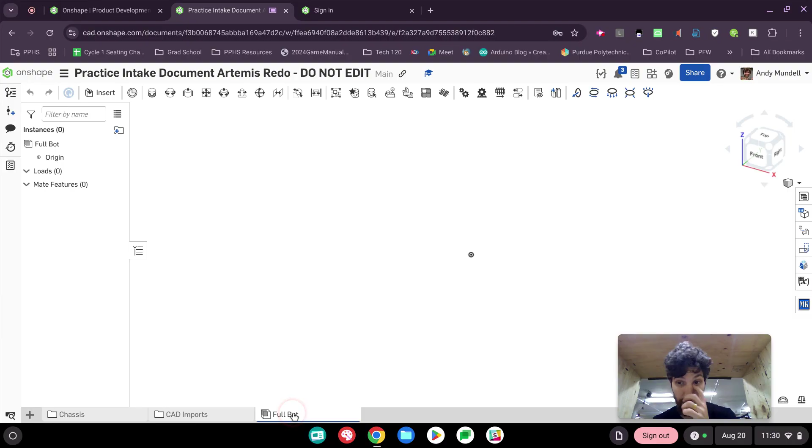All right, let's go back to the Home, and we'll find the full bot assembly, which shouldn't have anything in it yet. I'm going to click Insert, and I'm looking in the current document. I'm going to look at my assemblies, and you'll see the only assembly I have so far in this whole document is the chassis assembly. Let's add that to the full bot.

Now, one of the reasons I made this reference cube is so that all of my assemblies can kind of be positioned relative to each other. So I do want to click Fastened, and I want to fasten the top of this cube to the origin pointing up. Okay, there we go. I also don't like seeing all these mate connectors. Let's hide all mate connectors. There we go. So I fastened that in place, and none of it should be able to move at all.

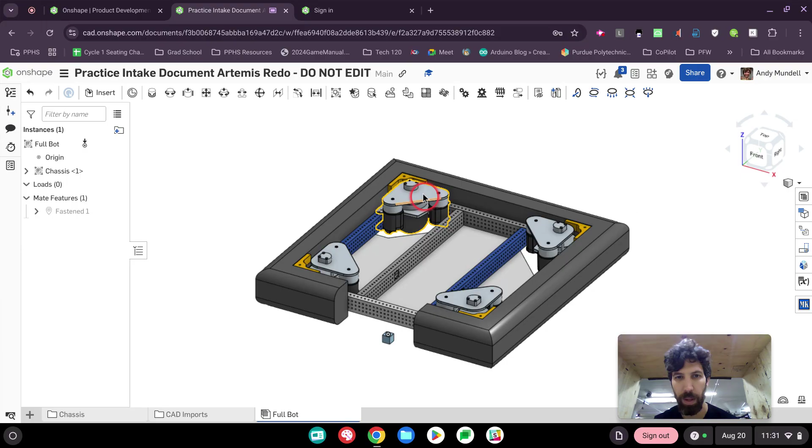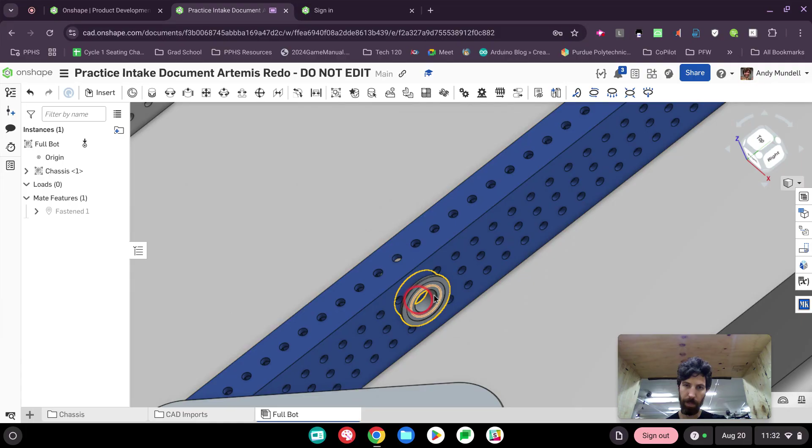If you did the chassis assignment before, you'll notice there's some small differences. I've added some bumper mounts. I took out this section of the bumper, which these days FRC makes you have full bumpers, but back when Artemis was made, we had a gap here so that the ball could come in, and that was legal then. So just use the one I've got here, even if you made your own chassis. Use this one because it's updated. I've also made sure to add bearing holes here to the chassis where we're going to mount our intake. So it's already there.

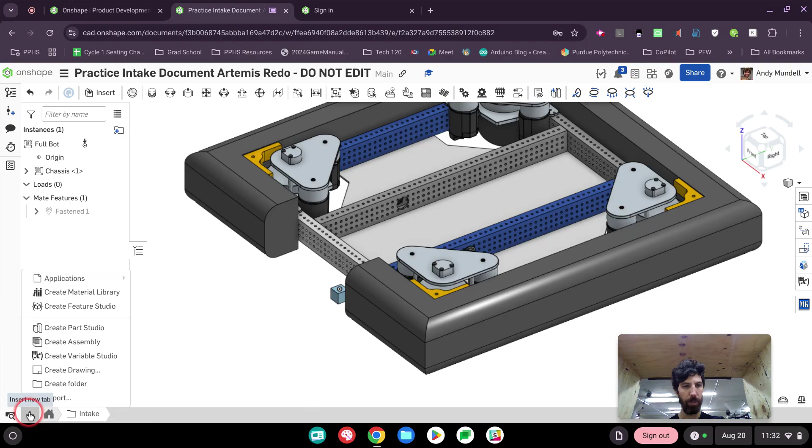All right. So the next thing I'm going to want to do is start making my intake. So I'm going to go click, make a new folder, create folder. Let's call this folder Intake. And within that intake folder, I'm going to create a new Part Studio. And they call it Part Studio 1. Let's call this Intake Part Studio.

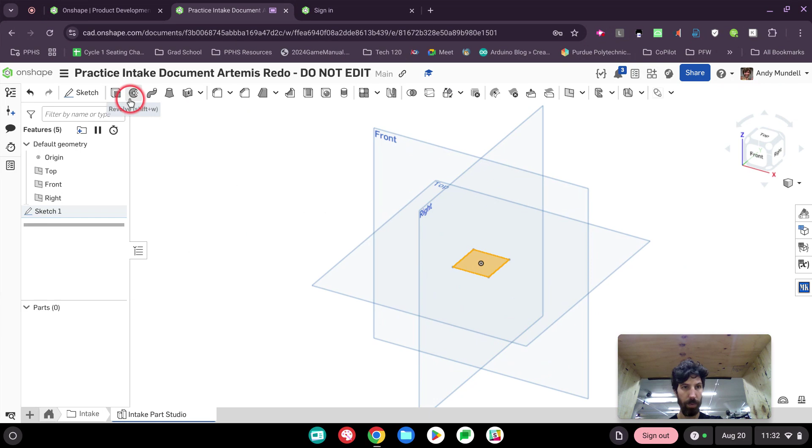Okay. I'm going to make a reference cube, and then I'm going to make an intake assembly. So let's sketch a reference cube here in the top plane. Center point rectangle. It's 1 inch by 1 inch. And I'm going to extrude it downwards. Okay. Let's go ahead and create an intake assembly. So let's click plus, create assembly. It's called Assembly 1, but let's rename it as Intake.

Let's go ahead and insert our reference cube. So we're looking in the Intake Part Studio. We're selecting Part 1, which is the reference cube. There we go. And just like we always do, we're going to fasten this reference cube to the origin. So let's click Fastened. There we go.

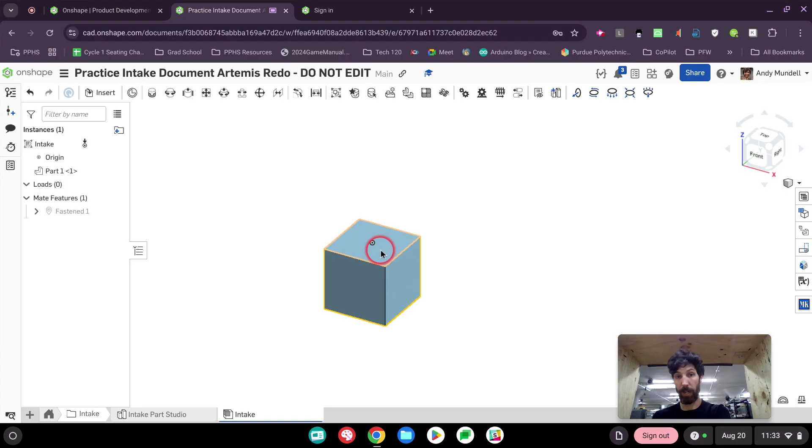All right. What do we do now? Well, we could start modeling intake parts, but I want to take advantage of what's called in-context editing. So the first thing I'm going to do is take my intake assembly, which right now is only the reference cube, and place it into my full bot assembly. So let's go back to the Home. Let's find my full bot assembly. Here we are. And let's insert.

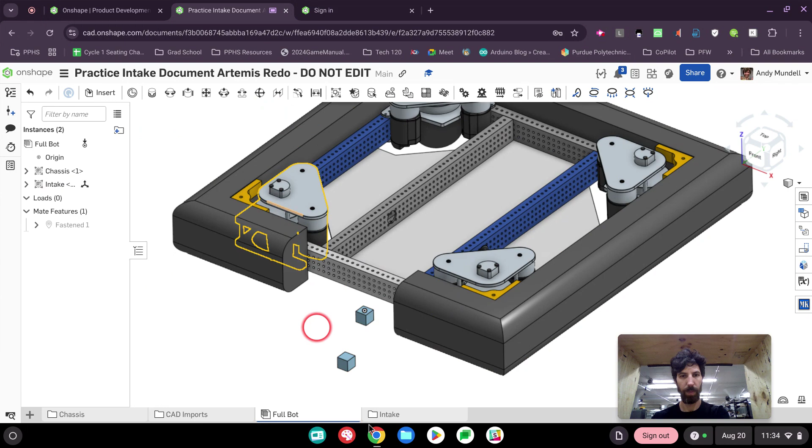We have our chassis in here. Let's insert the intake. Insert. Let's look under Assemblies. There's my intake assembly. So I'm going to click it. And you'll see all I have is a reference cube. But I'm going to make sure that that reference cube is fastened to the same location as my other reference cube.

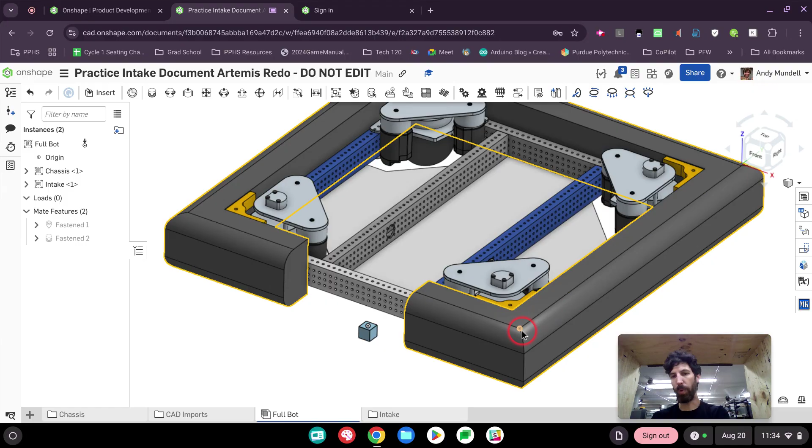Now that it's in here, I'm going to do what's called in-context editing. I'm going to edit my intake parts with a ghost of the rest of the robot around. Before I do that, let's hide some things that I won't need. So for instance, I won't need the bumpers when I'm making this, and I won't need the bumper mounts for sure. Okay. I'm hitting the Y key as I hover over things. That's a great way to hide things quickly.

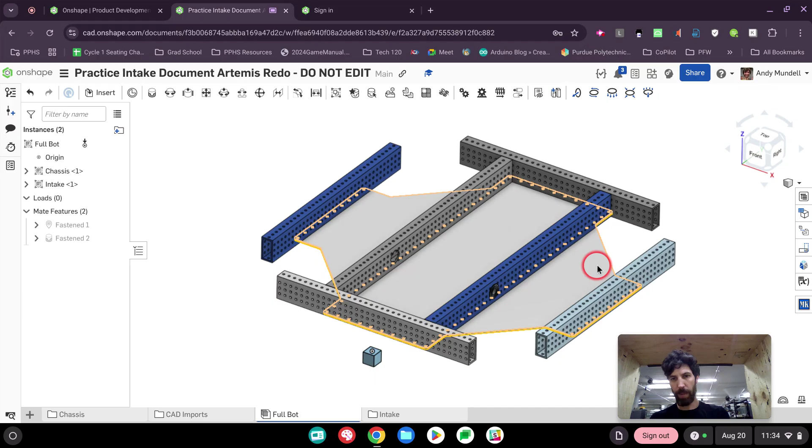I probably don't need the swerve modules as well. They're going to kind of be in the way. I'm really going to need this rail here, and I might want to be aware of the front and the back rails, and maybe the belly pan here. So let me hide these side rails here. So this is kind of what I'd like to be able to see as I reference and build my intake. So this is the context I want to build my intake in.

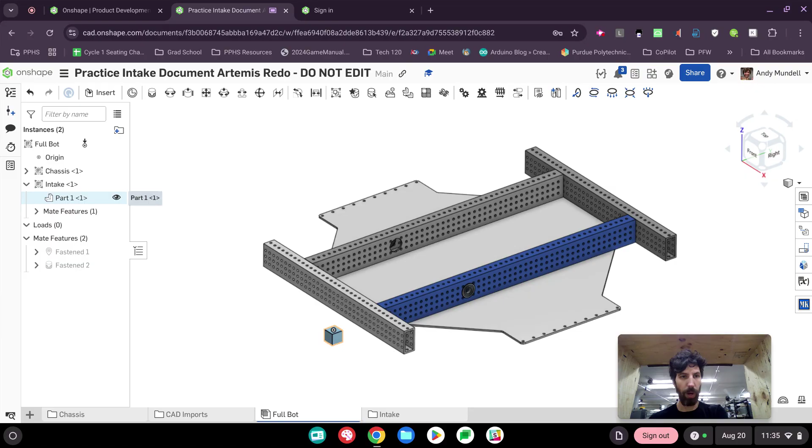All right, so let's go into my intake parts, and we'll find part 1. This is the reference cube. And you can do this for any part that's in the assembly, but this is the only part from our intake. So I'm going to right-click on part 1, and I'm going to select Edit in Context. What that does is it takes me back to my intake part studio. You can see at the bottom I'm in my intake part studio, but it now shows a ghost of the full bot assembly in the state that I had it in.

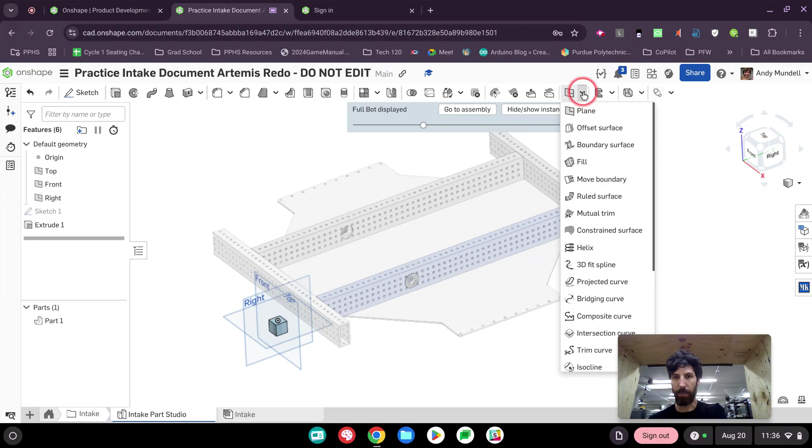This is really helpful because I'm going to use this to build things. So for example, well, actually, I'm not quite done. I've got my context here. I also need to import or derive my intake 2D sketch. So I haven't done that yet. There's a lot of setup that goes into these things sometimes. Let's find the derive tool. And if you can't find it, you can always use search, but it looks like it's under this menu here, derived.

I'm going to select from other documents. This is in the FRC team drive under shared CAD, Artemis practice CAD, 2D sketch. And let's go ahead and put in, we really just need the intake sketch, I believe. It might be useful to have the chassis side view later. I don't think we need it. Yeah, I think we're good. I'm just going to use this. All right. So now I've got this sketch built in here too. So I've got my derived sketch, my intake. I've got my context open.

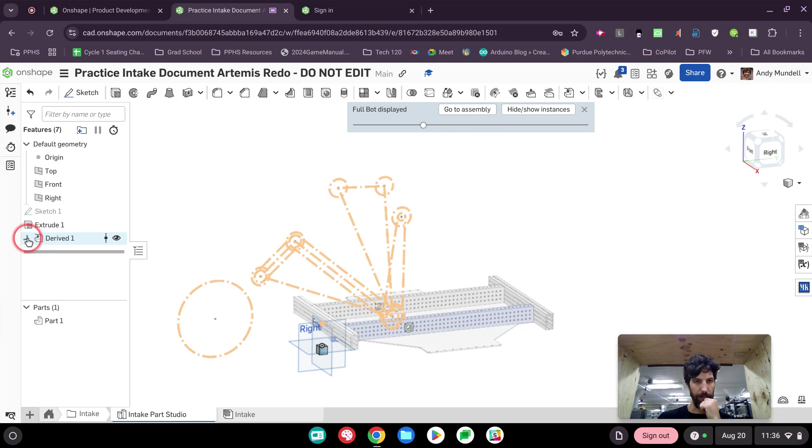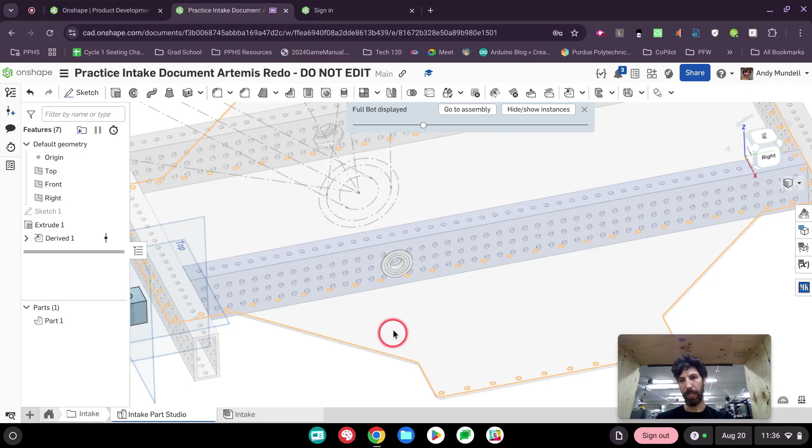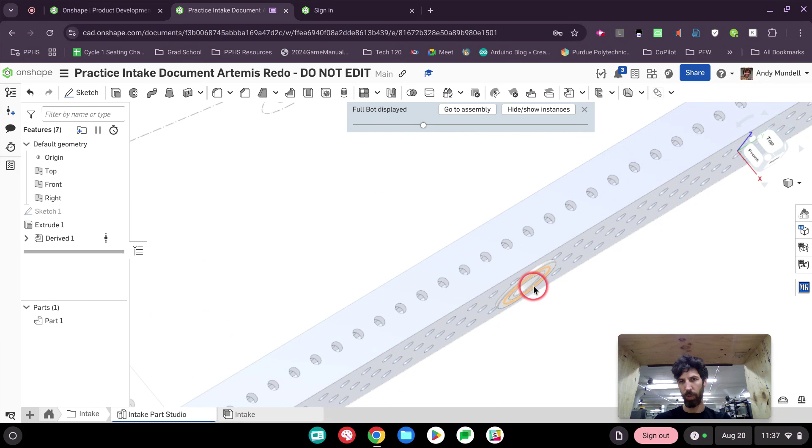Let's kind of start building. I think the first thing I'm going to want to do is start building a plate. All right, let's build a side plate. So where am I going to build that plate? Well, it needs to be sort of offset a little distance away from this side rail, enough where I have space for this bearing. I actually also want to have space for the indexer structure here that's going to attach to this rail on the outside about 1/4 inch. So maybe it needs to be 1/2 inch off of that. Let's go ahead and do that.

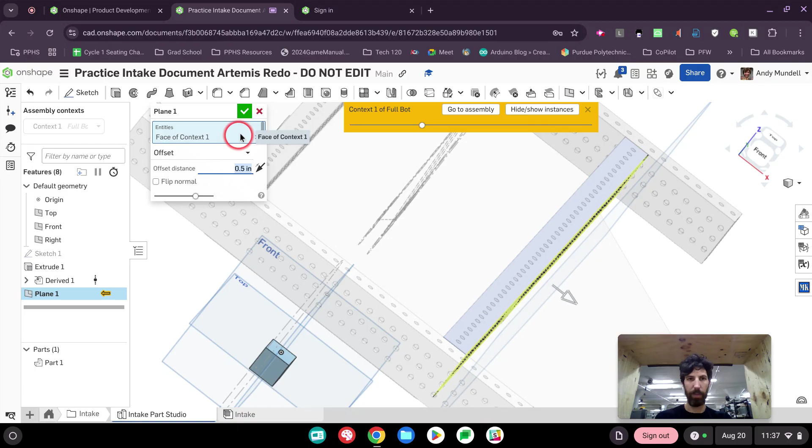Let's grab my plane tool. I think it's under the derive now. Yep, there's the plane. Find your plane tool. I'm going to select this plane right here to offset off of it. And I'm going to offset from there. It's an offset plane. Let's do 1/2 inch. And I'll be able to change this later if I change my mind. There we go. So this is the plane I'm going to create my intake side plate in. Let's click sketch and let's select that plane.

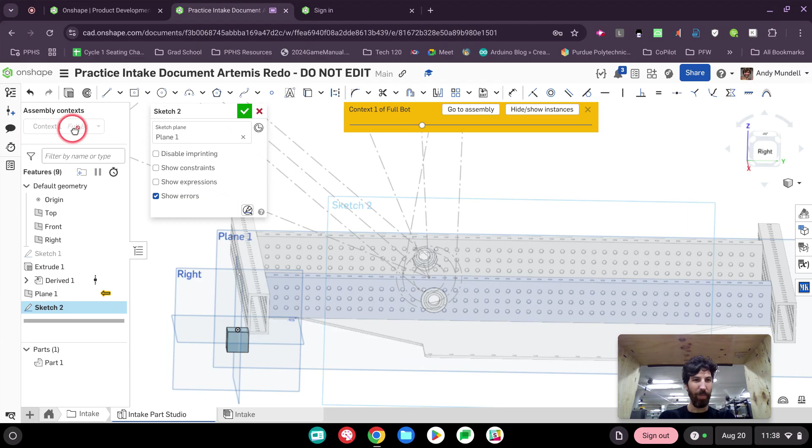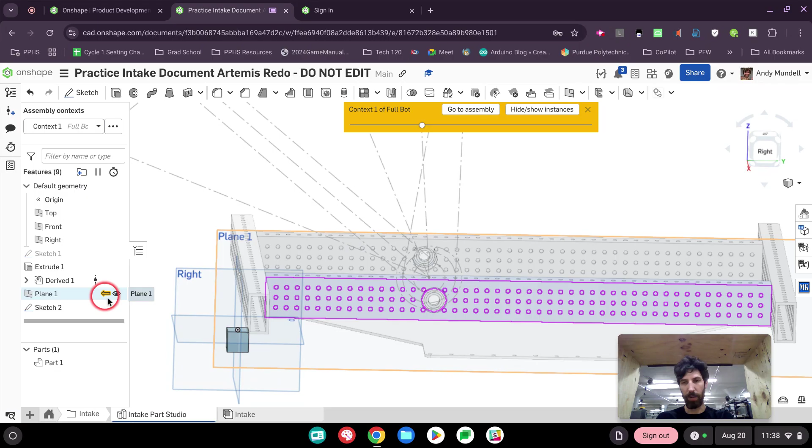Oh, one thing worth noting. Do you see how plane 1 here has got this yellow arrow? That means it used the context. This is important because you want to know what context you're using to design these things. And also, if you never use the context, it will disappear. But now that I've used it, I can go up here and I can select context 1, or I can turn off the context. But because I've used it here, I can go back to it, and then we can see all the things that have been made out of that context. All right, let's reopen Sketch 2.

All right, so what's this plate going to do? Well, this plate needs to be the pivot point here on the chassis. It's going to connect via a belt here to power the intake. And something not pictured here is it's going to connect via chain right here as well. That's going to allow me to pivot the whole intake. And then from the power of this motor, it's going to belt up to here and down to here to get these wheels spinning as well.

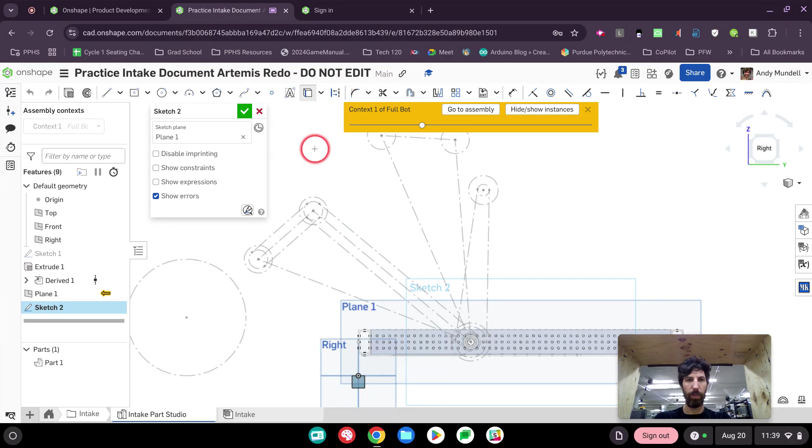All right. So the first thing I might do is to take any geometry from my sketch and insert it in. So for instance, I need to know where this wheel is and where this wheel is. That way I get the distance between them correct. I definitely need to know the center right here. And I think that's all I really need right now. Let me go ahead and hide the rest of that sketch.

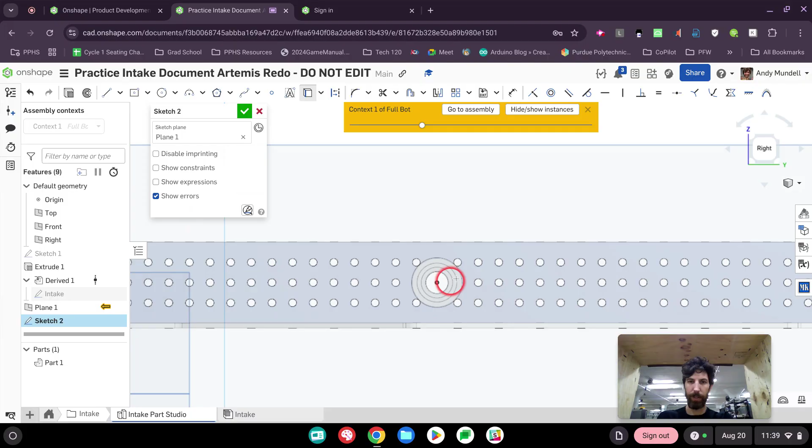All right. So what's this plate going to have here? It's going to have a hub inside of it, which I believe the diameter of that hub is the same as the diameter of the bearing. Let's do 1.125. I might be wrong about that, but I think it is. So it's going to fit a hub inside of it.

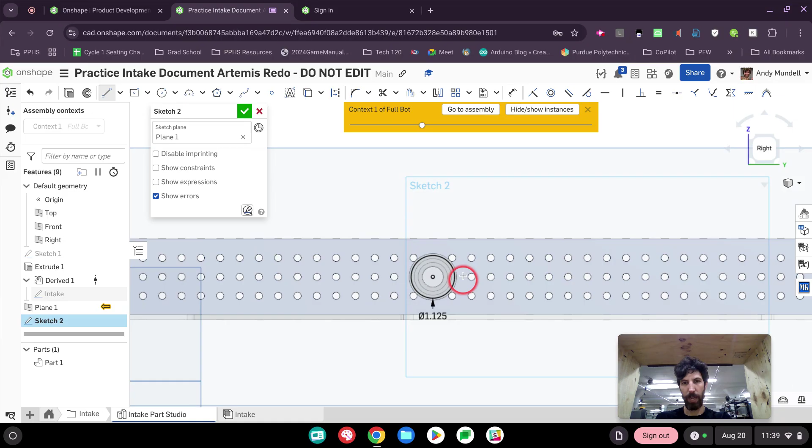And then on the outside, it'll have to have some holes to attach to the hub. But I might wait until we put a hub in it before I use those holes to put the holes in here. Actually, let's not. Let's just look up what that hole pattern is. Let's go to ThriftyBot. They have a lightweight hub that I like. Is it under motion? I'm just going to search for hub.

Number 10 hole pattern hex hubs. Here we go. And we've got the 1/2-inch hex bore thin hub. I'm going to use the thin hub. They include both a 1.875 and a 2-inch bolt hole pattern, so we can use either one. Yeah, let's go with the thin one. Let's go with the 2-inch bolt pattern. I always like that. And it looks like they are spread out in 6 holes.

While I'm at it, let me go ahead and download this CAD file. It's right here. Hex hub 0.375. Which one are these? Let's get a list here. Thick. Here's the thin one. I'm going to download this one. Okay, so I've got it. Let's go back to our document here.

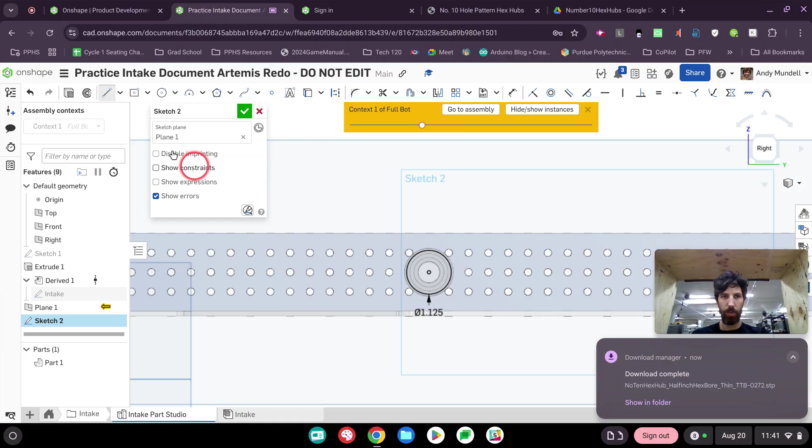So it's got a pattern here of number 10 holes, 6 of them on a 2-inch bolt circle. Actually, let's not do that. Let's grab the bolt circle. 2-inch bolt circle. I made that a construction line because it's not actually a feature. I'm just going to use it to build stuff off of. 0.201. And let's grab my circular pattern tool. Pattern that with its center being right there. And there's going to be 6 of them. Okay, so I've got that.

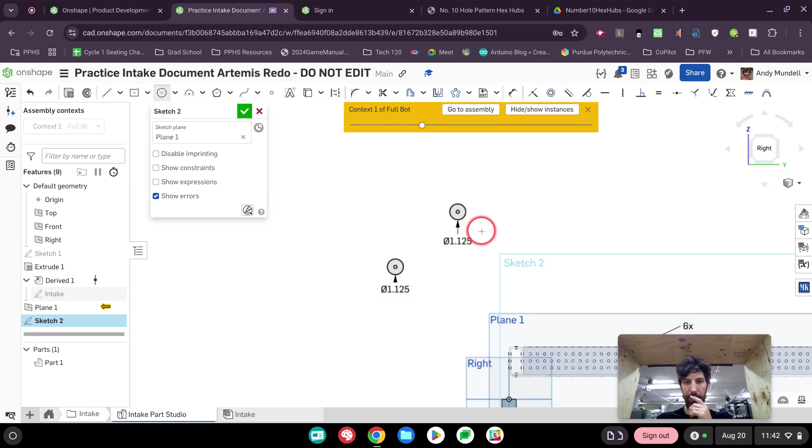Let's go ahead and do the rest of this. Up at this point, there's going to be another bearing. 1.125. This is our standard bearing size. We can make it 1.126, but this is polycarb. We can usually shove those in pretty well, or we can grab the reamer if it's too small.

Grab the line tool. I'm going to create a line that goes from here up to here. If I take the line tool back on itself, I can now make a curve. That's a nice little convenient thing here. Be careful. See how it makes that orange line? That's going to force that to be horizontal. I don't want to force that yet. So I can either avoid it and click, or I can hold shift. I'm trying to avoid accidentally having constraints that I don't want.

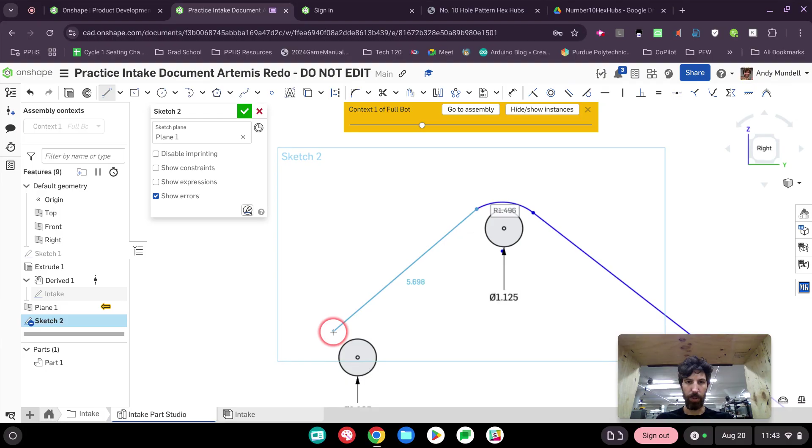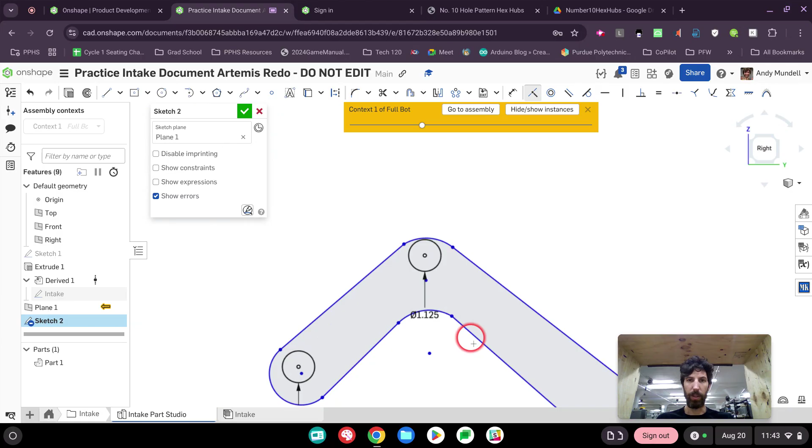There we go. Let's add some of our constraints. Coincident, a big one. Any of these arcs, I want them to be coincident and centered around the feature they're going around. So for example, this one right here, I want it to be that right there. And this one goes right here.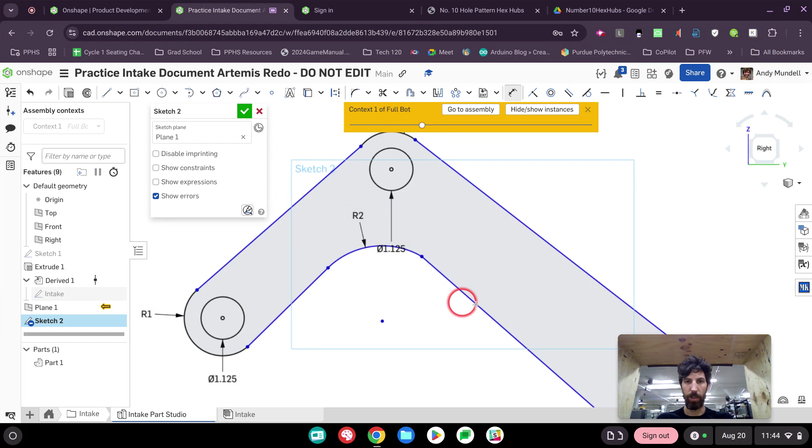Okay. Let's define some dimensions of these here. Let's make this maybe 1 inch. Let's see if this one works with 1 inch radius. Okay. This one, let's make this a bigger radius. Let's do 2 inches there. And this one here's going to be a larger radius as well. Let's try 2 inch. That's too big. 1.5. That might even be too big. Let's do 1.25. I think that works.

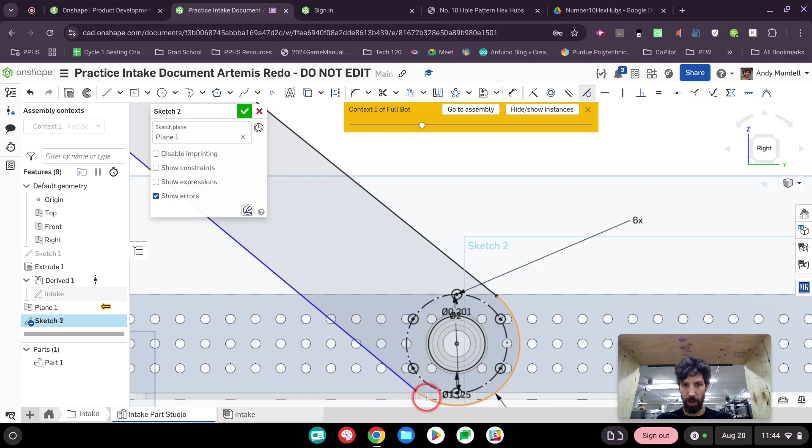Cool. You can see a lot of these things are still blue, so they're missing some constraints. I think we're missing a lot of tangents. For instance, this is clearly not tangent to that. While we're here, let's make sure this one is. Let's go up here. This one and that one.

Essentially, these features should go black if they're fully constrained. I don't think I've got the location of this here constrained. I think what I'll do for this one is I'll say that these two sides have to be parallel. There, and then this one has to be parallel to that as well. Okay, it looks like maybe I'm still missing a tangent here.

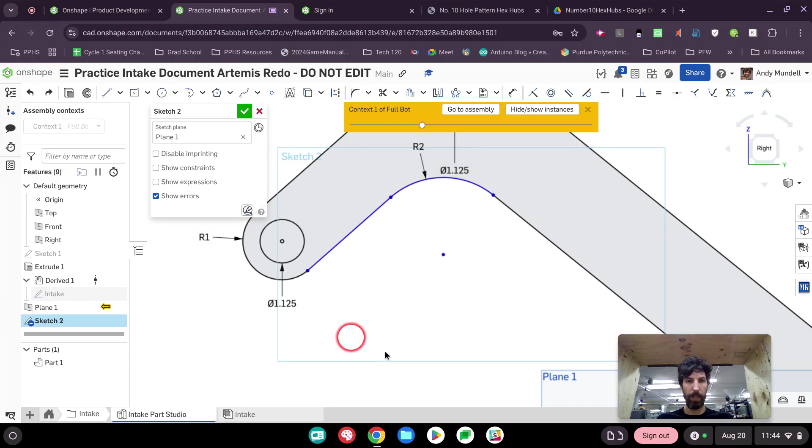If you ever don't know what constraint you're missing, let me undo that one. So let's say I didn't know what constraint I'm missing here. If I don't have any tools selected, I can grab one of the blue dots and I can usually move it. See, like I'm moving it. So now it becomes obvious what I'm missing. I'm missing this being a smooth transition. So if you ever don't know which constraint you're missing, try to make it obvious which one you're missing.

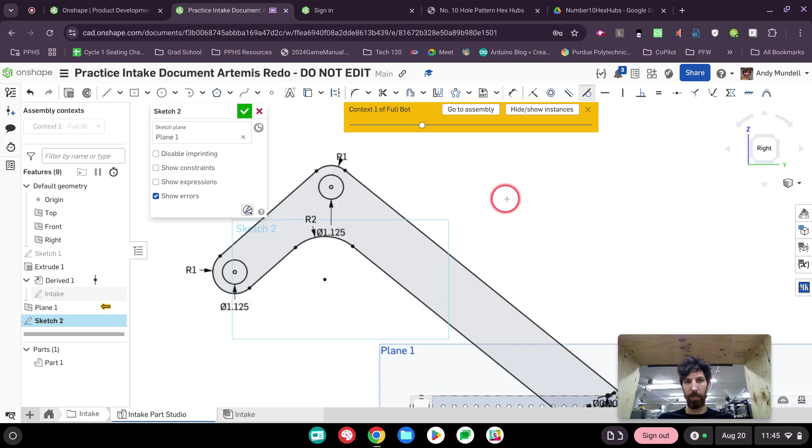Okay. I think that's good. This looks like a decent plate. I think the only thing I might be missing is as this pivots in and out, there's going to be an indexer in the way here, so I can't run anything between the two side plates. But up here, I might want to have some structure as this belting and these wheels are here, something to keep this distance right. So let me go ahead and add that.

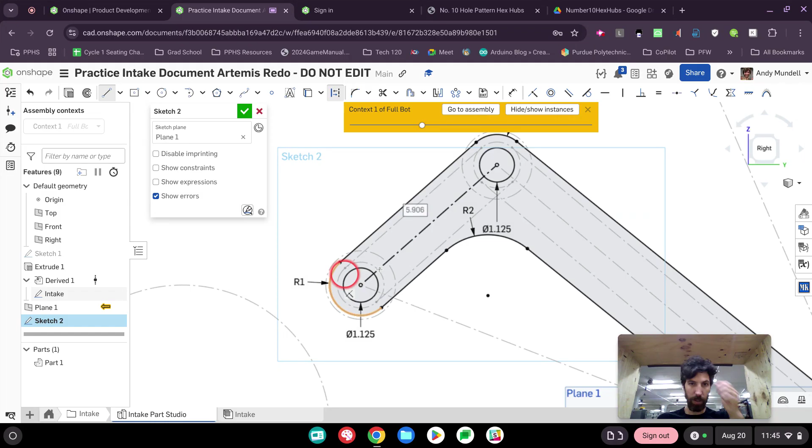Now, if I bring the other sketch back, you can see that my intention on this is to have, I believe, 2.25 inch wheels. Let me move this up here, 2.25 inch wheels. So those are there. So I want to make sure, and this is why this sketch is helpful, that if I'm going to put a churro here, I need enough distance between it and the wheel. Let's go 1/2 inch distance. That way I'm not going to accidentally have my churro hitting it.

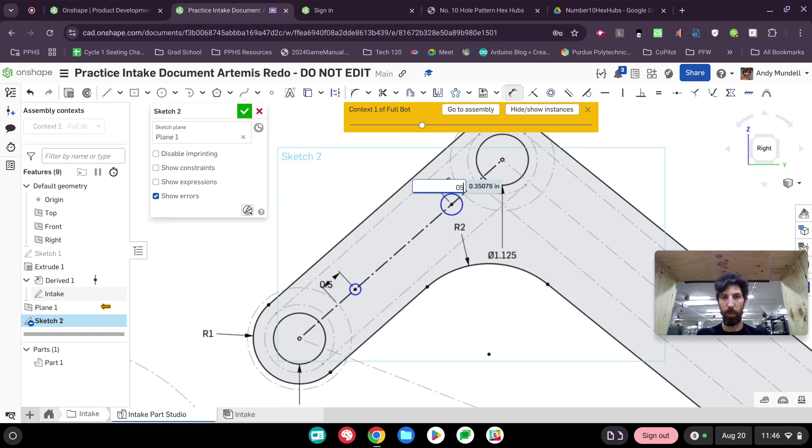And actually that needs to be not a construction line. There we go. So this distance here, let's make it 0.5. Oops, undo. 0.5. Now, if these are churro, they take a 1/4 bolt in the end. So let's just go ahead and dimension these holes to be 1/4 inch. And we'll make them both equal. Just like that. Cool. I think that's pretty good. I may have more things to add later, but essentially that's it.

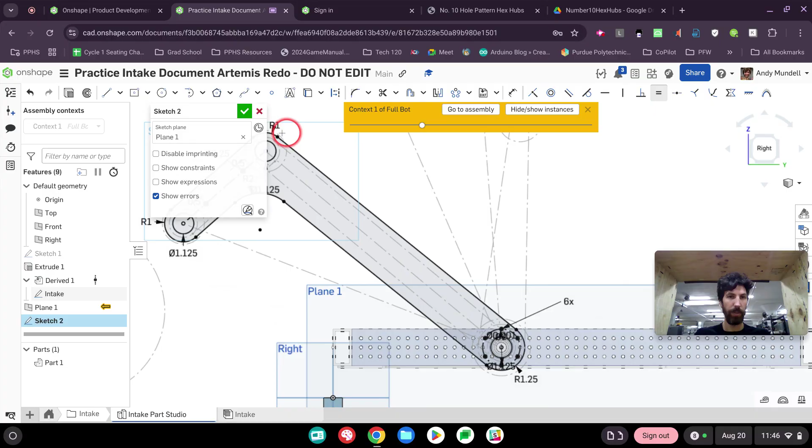I'm going to click the green check mark. I'm going to select that area, and I'm going to extrude it out. This is going to be made of polycarb, 1/4 inch polycarb. So let's make it 1/4 inch thick. Let's also right-click the part, edit the appearance, add a little bit of transparency to kind of convey that it's polycarb. It's kind of a smoked polycarb there. There we go. Cool. So that's that. Well, what do we need next?

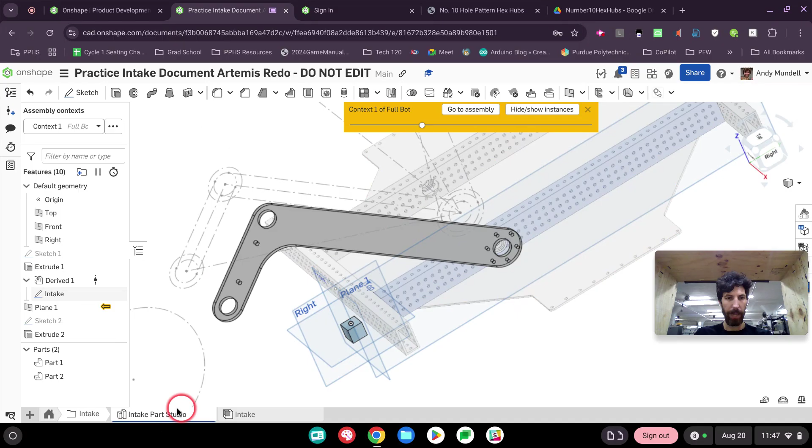Next, let's add that hub in. Okay, let's put that hub in here. So I downloaded it from the ThriftyBot website. Let's click plus and import. And let's go to my recent files. There it is, the hex hub. And I'm going to combine it into a single part studio. It's a nice simple part. We should be able to see it pretty easily. That way it's not a complicated thing. Oh, here it is, it popped up. There it is. So I've got this part now.

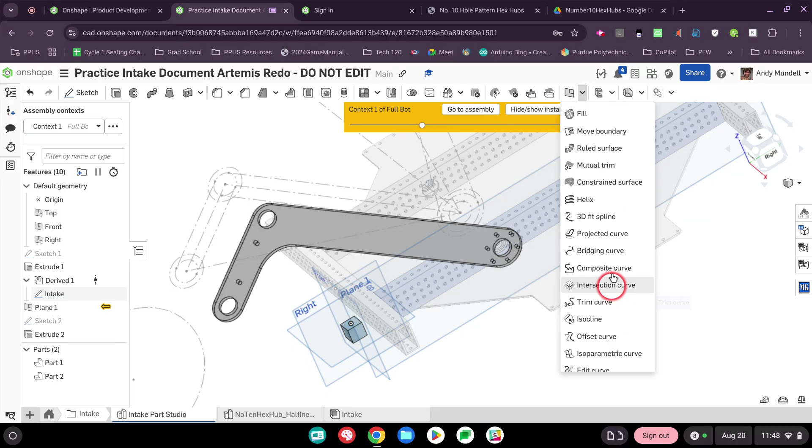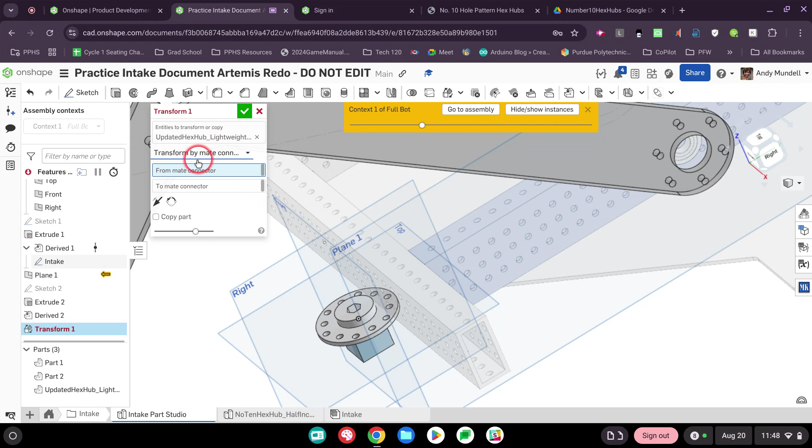Let's go back to here and let's derive it in. So let's find my derive, derived, and let's select from the current document. Here it is. There it is now. And let's go ahead and transform it. I'm going to transform this thing by mate connectors. From mate connector, I'm going to take this part right here. I'm going to have it fit right in this hole right here. See how well my holes align. They look to be spot on. That's perfect. If not, I might have to apply another transformation.

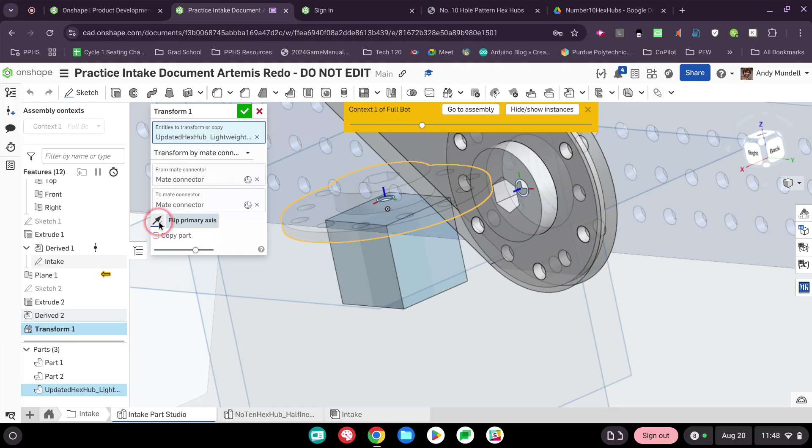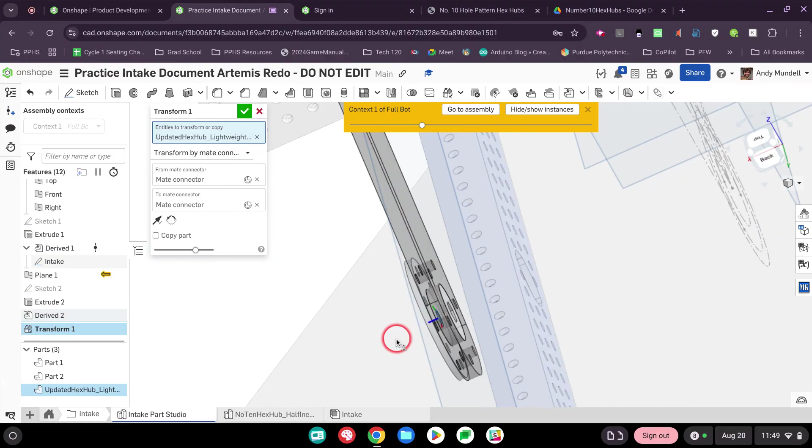One thing I didn't check is, I put it on the wrong way. Let's go back to transform and let's flip the primary axis. Okay, so that looks good. We're at the center of my hub right there. It does look like when I guessed the size of this piece here that it's correct. It fits right in there. They did a good job picking that to be bearing hole sized, and that fits right there. Cool. All right. What else do I need?

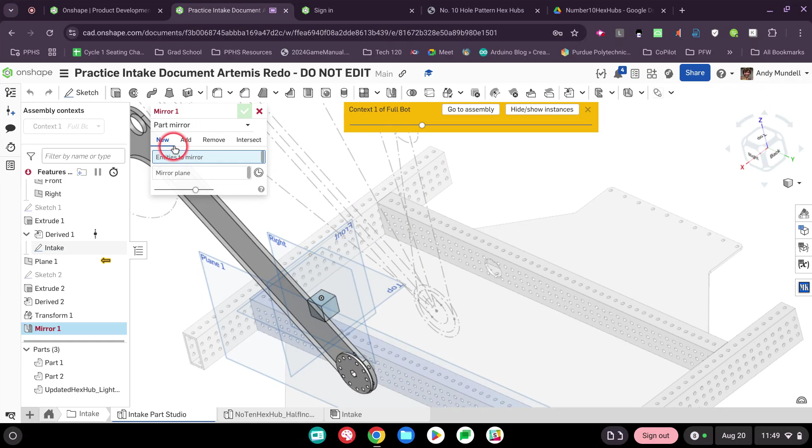Let's go ahead and mirror this to the other side. Okay. So the chassis is centered around the right plane here. I could also do a mid plane between these two sides if I wanted. But let's go ahead and just select mirror. And the entities to mirror, I'm going to mirror this. I'm also going to mirror my hub. And I'm going to mirror it across.

Be careful mirroring a hub or a COTS part. Like if they don't have the mirror version of it, you won't be all right. This part, if you mirror it, it's identical, so you don't need to worry about that. But be careful mirroring a part. You don't want to turn it into something that doesn't exist. Okay, there we are. That's over there. That's looking good.

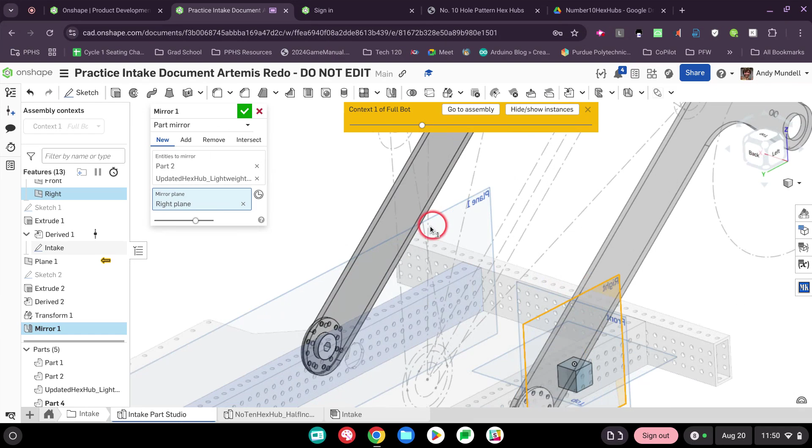Okay. Let's go ahead and connect my two sides. I was going to do some churro here. Now that I've got this, let's go to my tools. If you don't have the shaft generator yet, I recommend it. Go look for this feature script, install it.

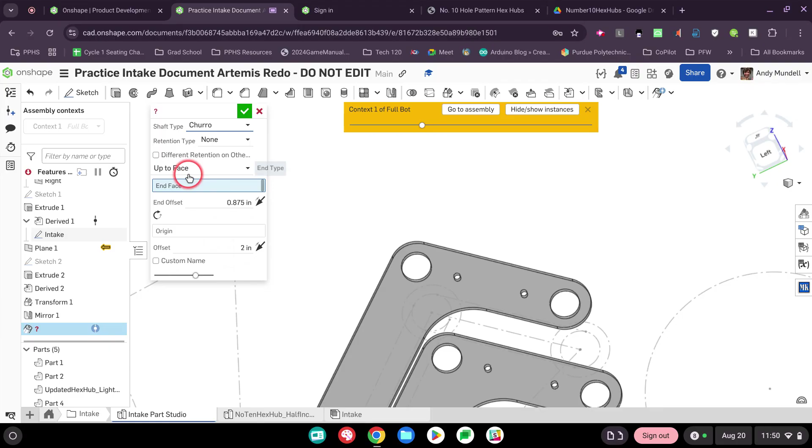Here's the shaft generator. I don't really like the way the shaft generator does this, but it has you select the type, which we're going to use churro. The end face will be this surface here, and my origin is going to be the other hole over here. So there it is. You can see I've used this tool recently because I have some end offsets. It remembers your old settings, which for some tools is appreciated and others it's not. So your offsets should be 0 there for this situation.

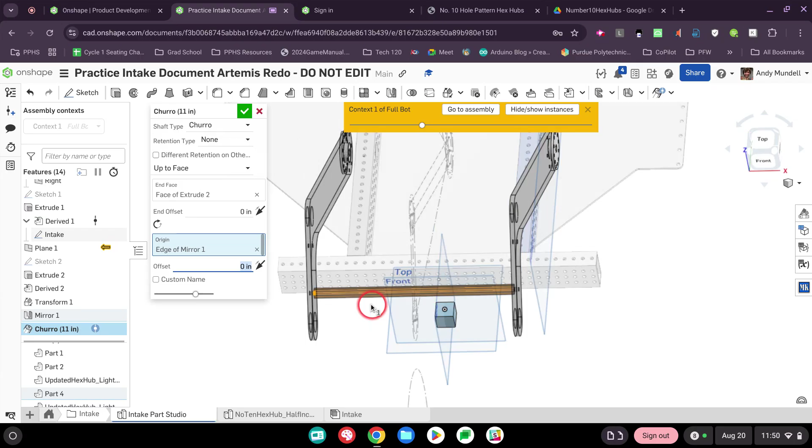I don't think I can select more than one origin. No, I can't. I've got to pick one. So I'm going to have to reuse the tool. Select this shaft generator. End face is over here. Origin is right here. And there's my other churro. That looks good. Cool.

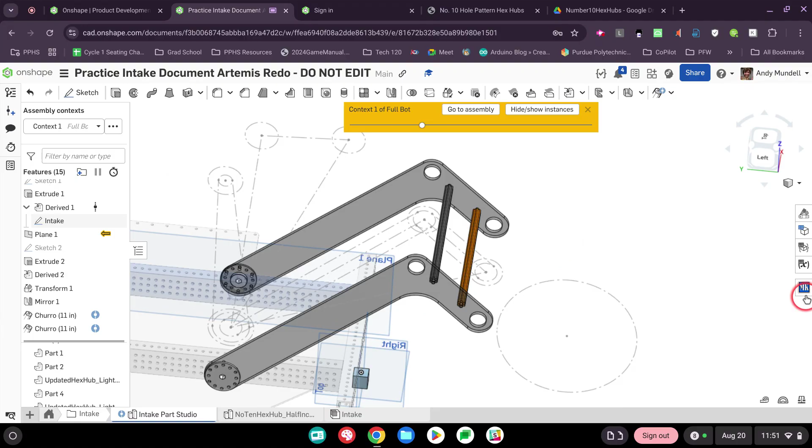Let's go ahead and derive in some bearings. Let's do some Thunderhex bearings. Use the 1.125 outer diameter. We use the flanged one. So let's click that. It should derive it here right into my reference cube. I'm going to hide my reference cube. It gets annoying trying to find things because they always derive on the origin. And now let's transform it.

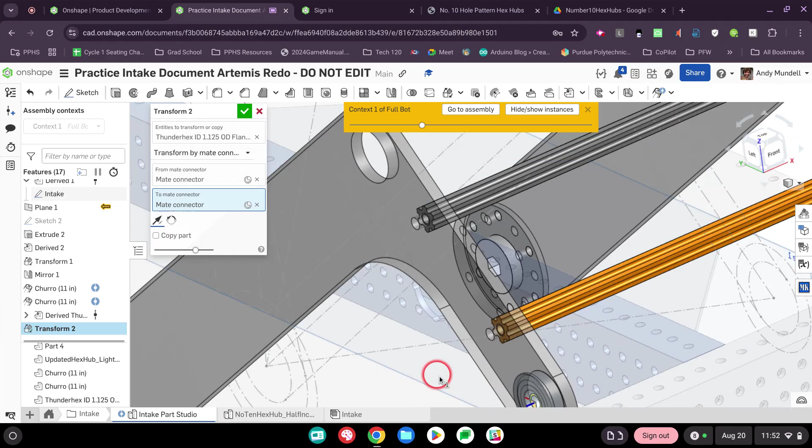Let's transform this by a mate connector from that location to this location. Now, this is something that I might be tempted to put in the assembly, but I like putting them in here because, and let me copy the part because I have a few of them, because if I derive them in here, I can use them to determine my shaft lengths. Because you add that little flange there, and it will increase the length of your shafts. So having them in the part studio, that's pretty nice for that.

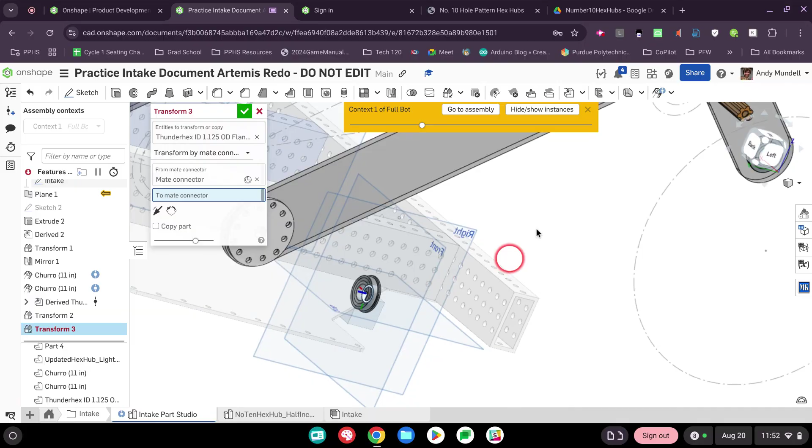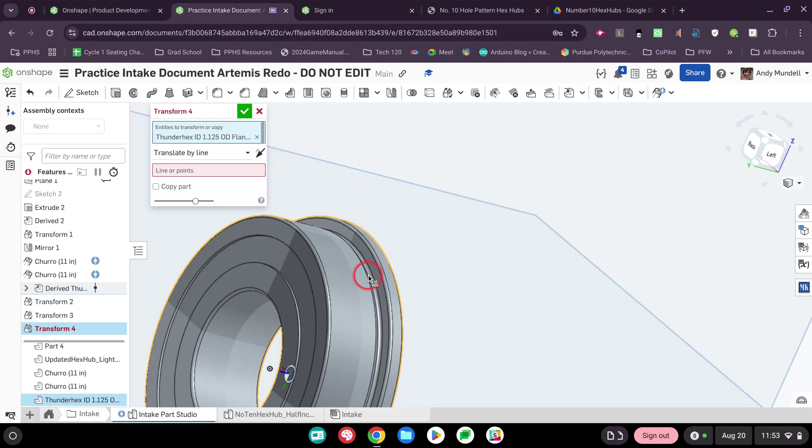Flip it. Let's copy the part. All right, we're transforming the next one. Oops, not that. I selected the wrong thing. I might want to hide the context. Let me cancel that. Let's get rid of this context. There we go. Now let's transform. Should be easier to select the stuff I want by mate connectors. From that mate connector to that mate connector. It needs to be flipped.

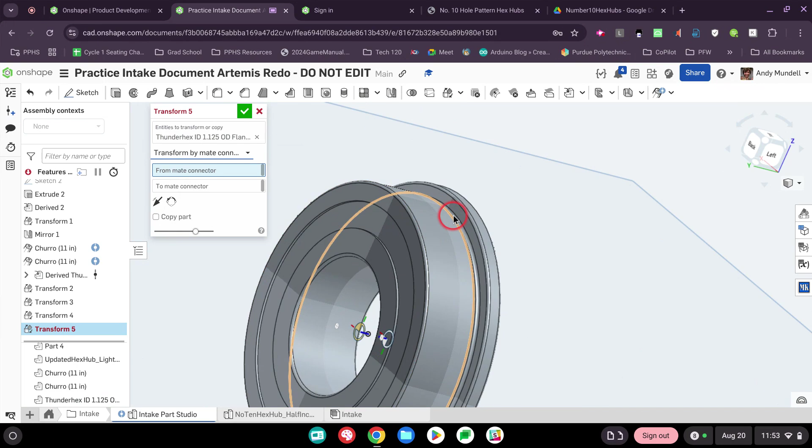And last one, let's copy it. We're going to transform this thing from this mate connector to that one there. Cool. All right.

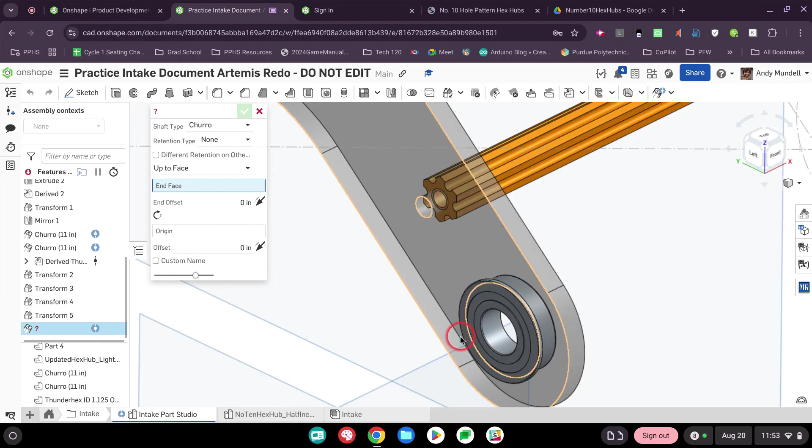What to do next? Well, let's go ahead and add our front set of rollers here. So the first thing we'll need to do that is a shaft. It's going to be going through this front. I'm going to make this Thunder Hex. Actually, let's do the rounded hex. That's actually what we use. We don't use Thunder Hex because its center was tapped to quarter-20, and now we like a center that we can tap to number 10. So we'll do the rounded hex here.

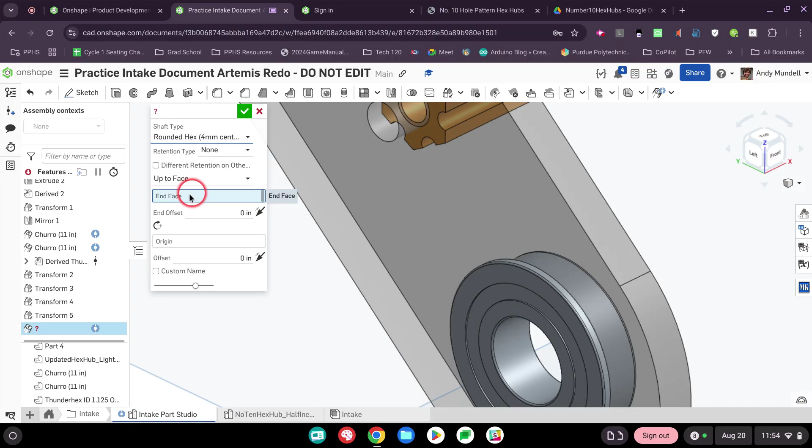So we need to select an end face, which we can put on the end of this flange. And then we need an origin, which will make it here, right here. There we go. Looks good. Looks awesome. And then we just put a washer and a bolt in the end there to retain that.

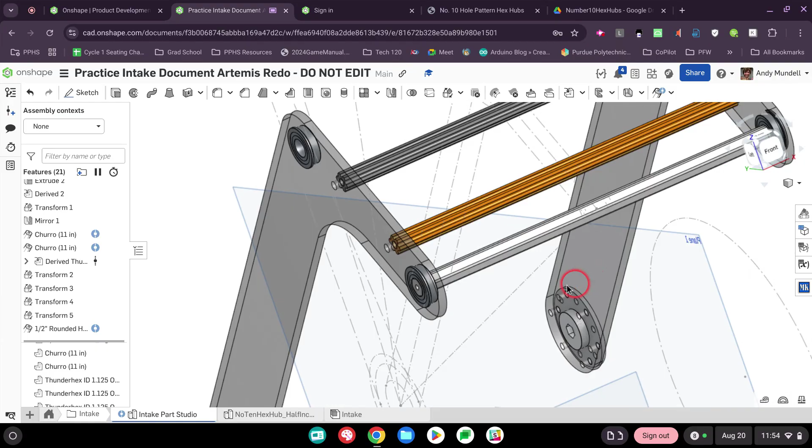So what goes on here? We've definitely got some wheels. So I think they're 2¼ inch. Yep, 2¼ inch compliant wheels. And then we also have, looks like a pulley here. If I click that, that diameter is 1.504. Whoever made the 2D sketch already did this work for us. Sometimes you have to do it as the designer of the subsystem.

But sometimes it's done in the 2D sketch. 1.504. You might say, well, what size pulley is that? Let me go to the WCP belt calculator.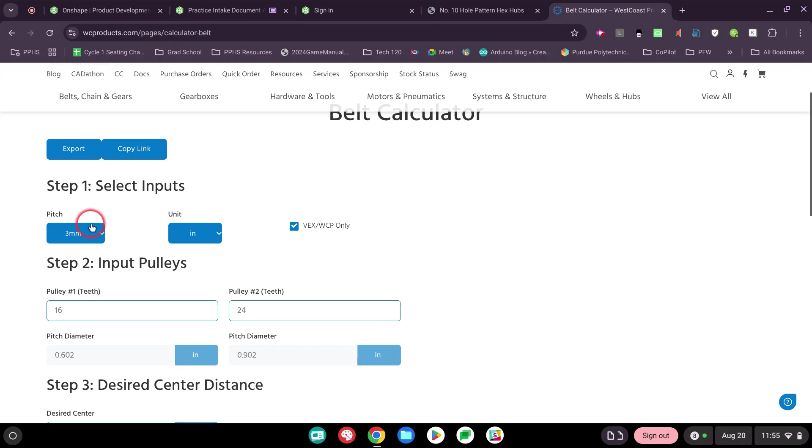And I'm just going to look and find what 5mm pulley has that size. So 5 millimeters, this is the pitch diameter. I'm suspicious it's 24 tooth. Yep, we use a lot of 24 tooth because they come in aluminum. So if it turns out that we don't want to use a 3D printed one, we can switch it to a very sturdy aluminum one. So this is a 24 tooth pulley. So let's go ahead and get a 24 tooth pulley in here.

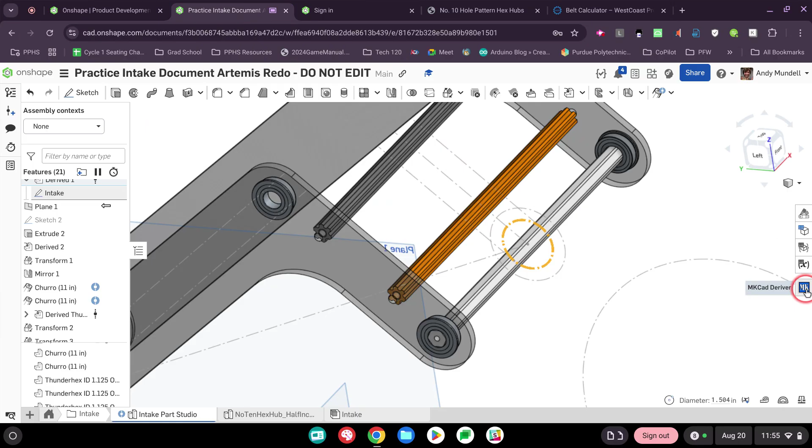I'm going to use the MKCad Derived. I'm going to do HTD pulley, and I want to select my configurable ones. We've got a configurable crown pulley, custom configurable HTD pulley. I'm going to select that one. The specifics on this, talk to a mentor, talk to an experienced student about the dimensions you're looking for here. 5mm pitch, that's the size belts we use. 24 teeth, yep, that's what we want.

The width, how wide is the belt? Well, we have 9mm and 15mm belts. I think we should use the wider one here because we're also going to put it in the middle to help guide the ball in, so we benefit from more surface there. Let's make this a 15mm belt, which means let's make it maybe an 18.5mm wide. That way it's a little bit wider than the belt. It's got space for it.

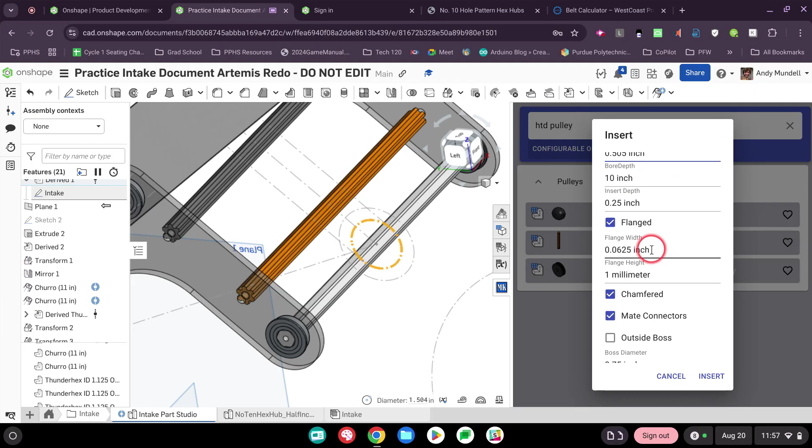The bore is a hex bore. Diameter is a 1/2 inch hex, a little extra clearance there. It has a flange. It's 1/16 inch thick. Let's make it a 2mm flange. I always think the flange should be a little bit bigger than the default here. And I'm going to not chamfer it. I think the belts stay better without a chamfer. Sometimes the chamfer helps it pop out. It does make them easier to print, though.

And I'm going to get rid of the mate connectors. I don't necessarily like those. Actually, no, let's have them. I think this might be helpful here. All right, let's click insert. There it is. Okay. So let's go ahead and transform this thing and put it where we want. Transform. Let's grab the middle one. I think it's this one right here. There we go.

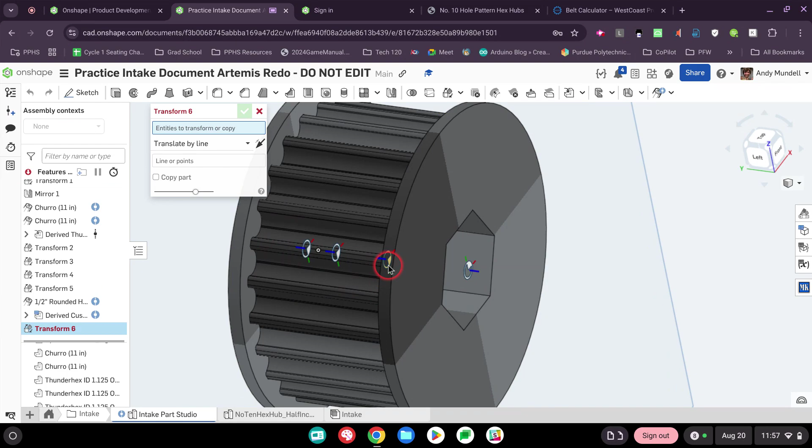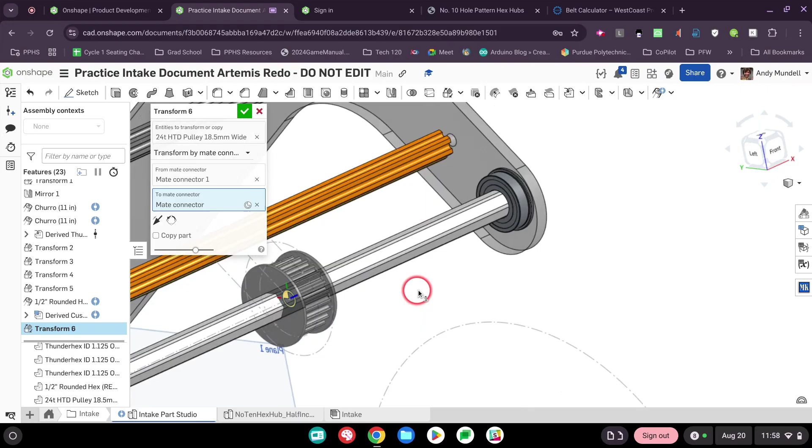Oh, I'm not transforming the mate connector. My mistake. Entity. Let's click the whole pulley. Now transform by mate connectors. Let's select this one. We're going to send it to the center of this shaft. There we go. It's oriented correctly. That's pretty awesome. We need to put another one up here. So let's copy the part, and let's transform it. Mate connectors right here.

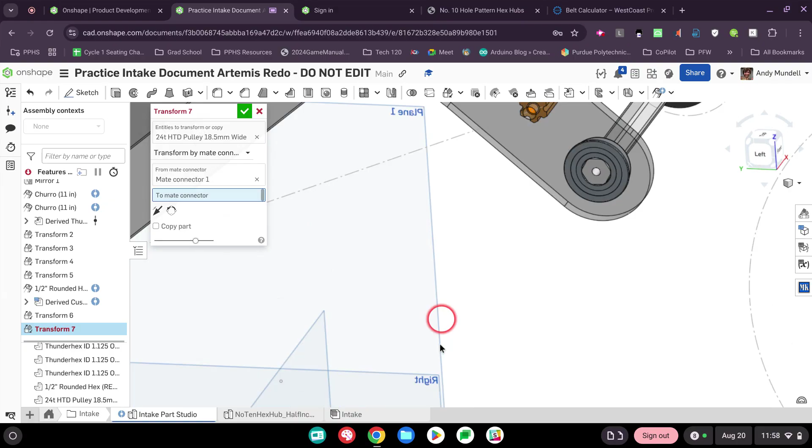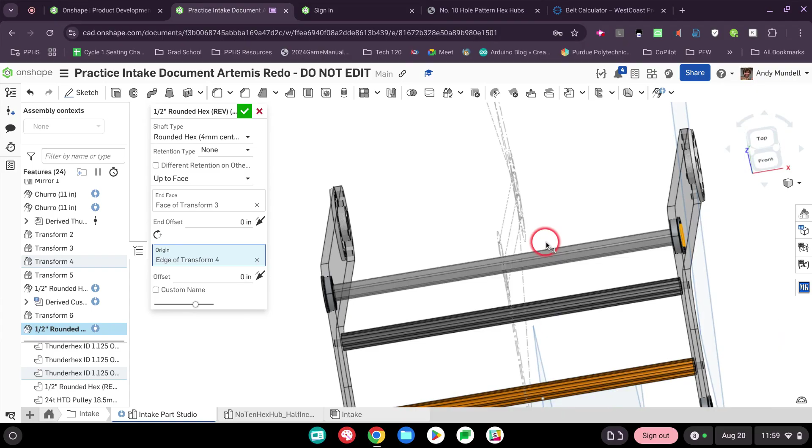Oh, I didn't do the other shaft yet. Dang it. Well, let's wait on that. Let's insert my other shaft. This shaft is going to end over here on this side, and its origin is going to be over here. There we are. Now, it is going to have to stick out farther because it's going to actually require a belt coming from down here up here to power the whole thing. Then we're going to have the other belt go in the middle. So this needs to stick out.

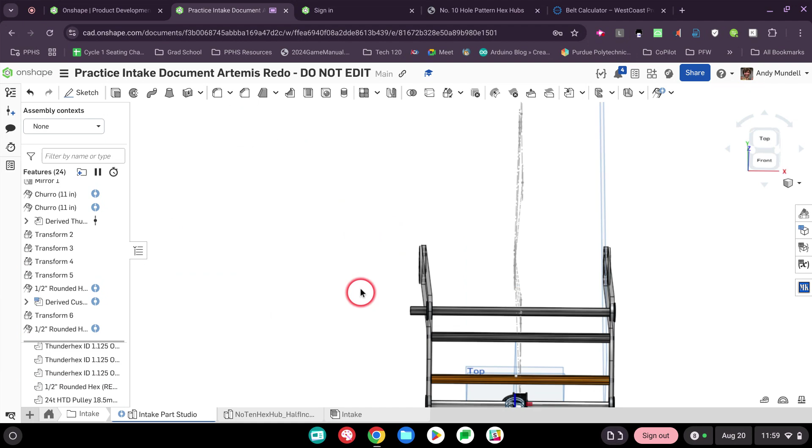So we need to add an end offset. An inch, that might be good for now. I don't know if it will or won't be okay. I'm going to assume an inch is good enough. We can always go back and change this. There we go. And now let's go ahead and get this transformed by mate connectors. Here's the center mate connector. We're centering it right on here. I'm actually using the 2D sketch to locate it, which works out fine here because it is centered.

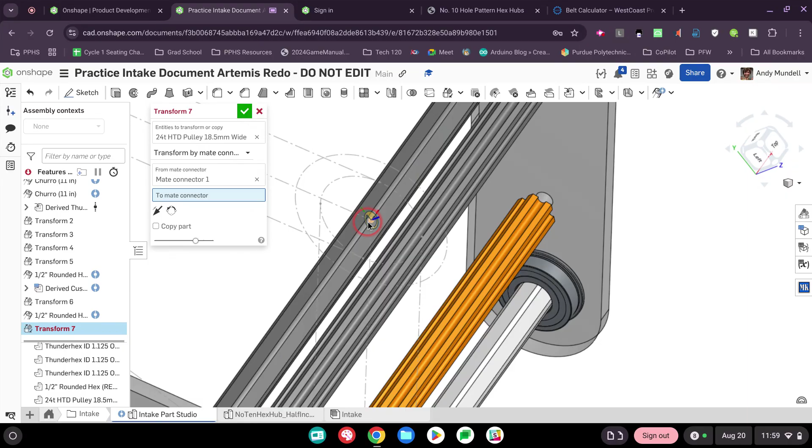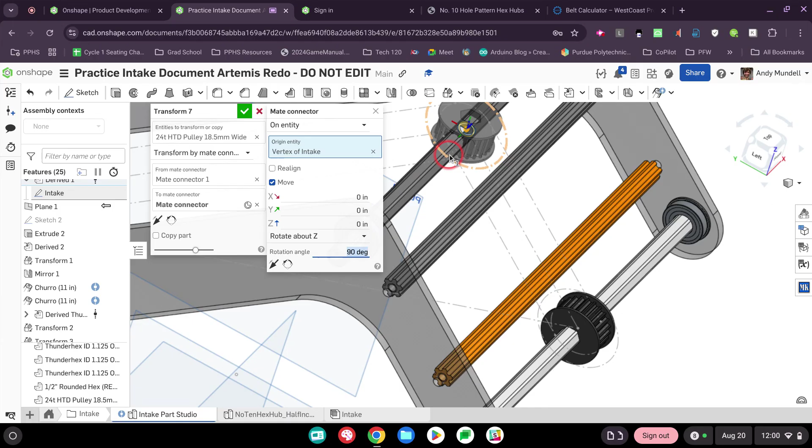Oh, can I get it pointing out the right way though? Not sure if I can. There we go. Ah, no, it's not. Let's edit this. Let's rotate it 90 degrees. Instead of about Z, let's do about X. Oh, let's do about Y. There, that'll work. There it is. Okay, this isn't quite lined up there, but that's okay. I'm not going to worry about that today.

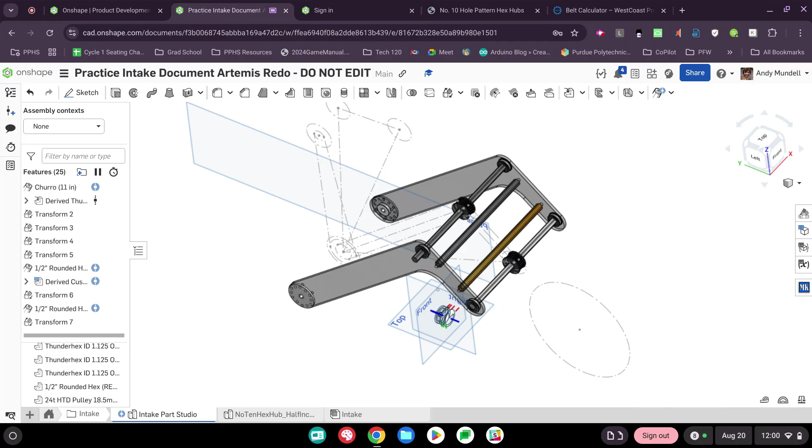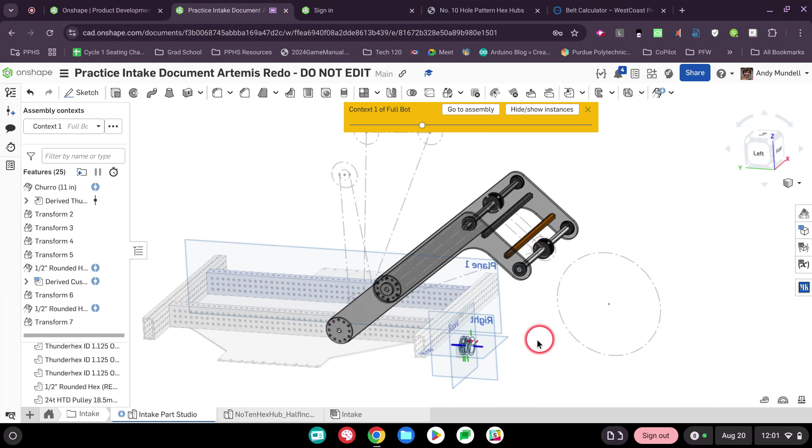I think I'm going to stop here. I don't want this video to get too long. I think that's a pretty good start, and I'll do a second video to look at next steps, where you can get the idea of what we're doing here. We're using my 2D sketch to define some features. I've got my in-context editing going on here, so you can make sure that it's fitting in line with stuff, and we can build off of these right here. So I've got lots of really good options for modeling relative to my other stuff. And I know it's going to fit because I'm basing it off of my 2D sketch.